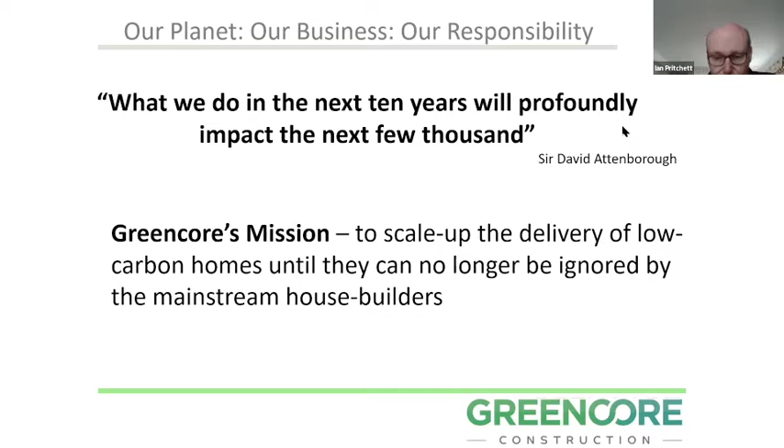Setting the context of what's happening from a political and environmental point of view, I'm really excited about being in Oxfordshire because I think it's one of the places to be working at the moment. All of the councils in Oxfordshire have declared a climate emergency, and we've got this great initiative with Bioregional of One Planet Oxfordshire to make Oxfordshire the first One Planet county in the world.

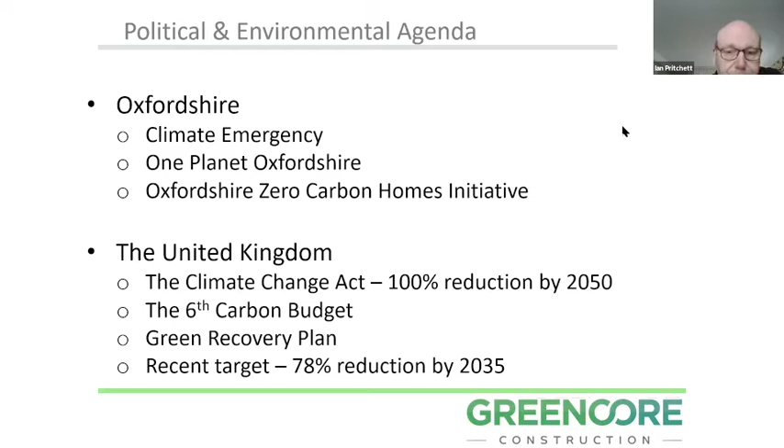There's also this really good initiative with Oxford Friends of the Earth, the Oxfordshire Zero Carbon Homes Initiative. So there's a lot happening within Oxfordshire, but within the UK, we know we've got high-level legislation such as the Climate Change Act, the 6th Carbon Budget, the Green Recovery Plan as a way of recovering from COVID, and a relatively recent target of 78% reduction in CO2 emissions by 2035. So really, everything is set for this decade of change.

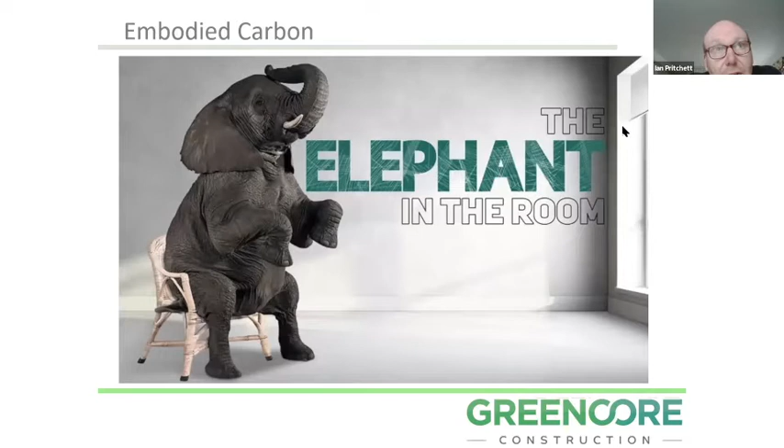But the thing that worries me, the elephant in the room, is embodied carbon. Everybody's talking about zero carbon, but do they really know what zero carbon means? When we build a new house, all of the materials and their manufacture, processing, transport and delivery and construction on site are all responsible for CO2 emissions. A typical house is responsible for something like 50 to 60 tons of CO2 emissions, and that's what's known as its embodied carbon, or its upfront carbon, or its carbon footprint.

And then if we've done a reasonable job of building that house, it's going to emit another 5 tons of CO2 per year in use. So that means that houses we build this year will be responsible for 200 tons of CO2 by 2050. We know we've got a problem with CO2, and yet we are still contributing to the problem. It seems to me that we've got to stop contributing to that problem as quickly as possible.

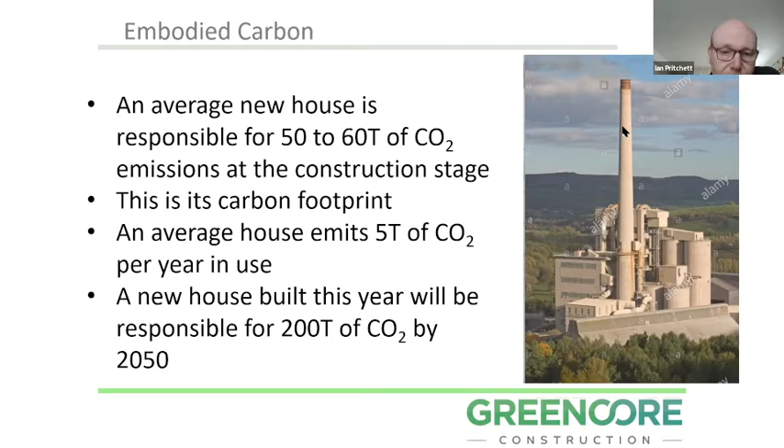Addressing both the embodied carbon and the operational carbon is really important, because when most people are talking about zero carbon, what they really mean is the operational emissions. And we've got to tackle both of these things.

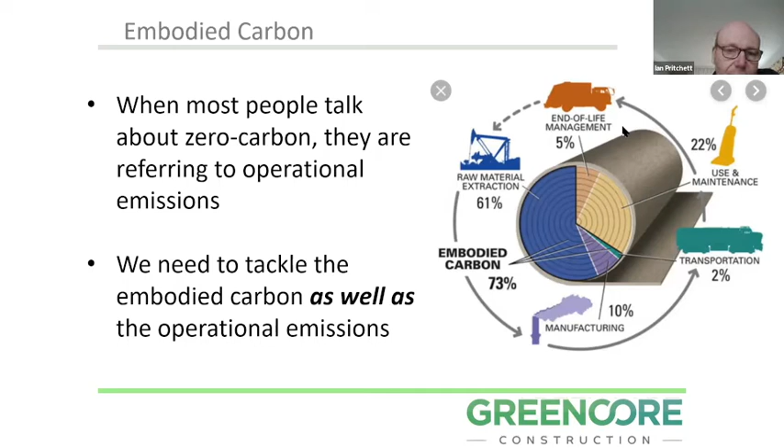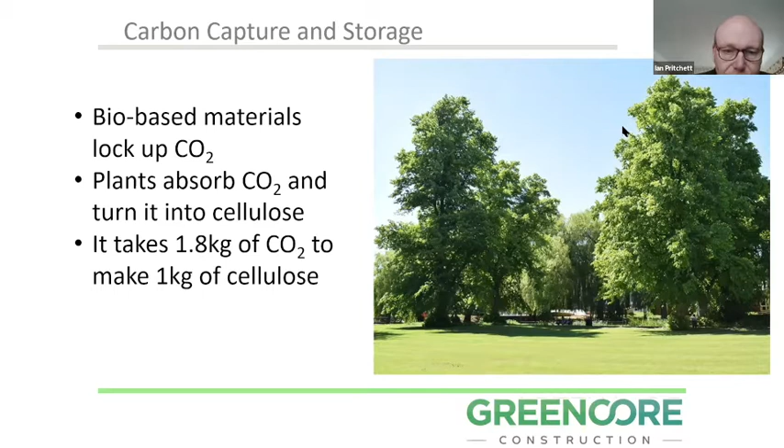Fortunately, bio-based materials are one of the tools that we can use to deliver zero carbon buildings and low carbon buildings, because they capture CO2 during their growth and lock it up as cellulose through the process of photosynthesis. If we work our way through the chemistry and the maths of photosynthesis, there's this great multiplication factor: it actually takes 1.8 kilograms of CO2 to make a kilo of cellulose. So every kilo of cellulose we lock up in a building is actually locking up more than 1 kilo of CO2.

So it's pretty straightforward, really. The more bio-based materials we incorporate in buildings, the more carbon we lock up. Replacing high energy materials such as steel and concrete with bio-based materials such as timber locks up carbon and reduces the carbon footprint. So when we come to design a building, all of the choices we make in the design and construction determine not just what the building looks like, but how it performs thermally and what its carbon footprint is. And if you make the right choices, you can build houses that have zero carbon footprints and zero emissions.

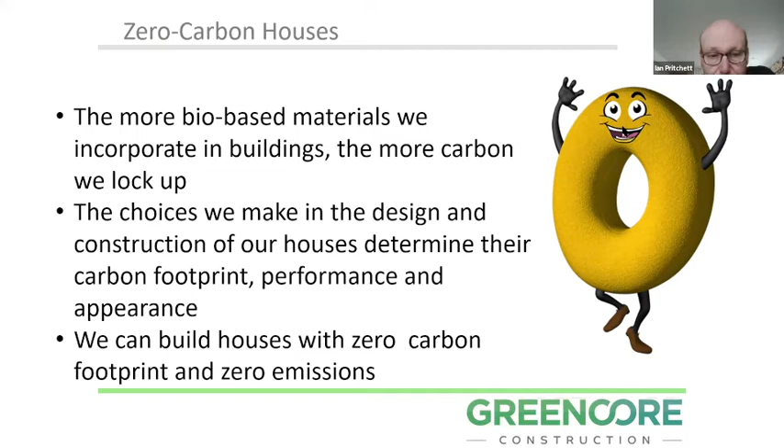And that's what we try to do. So we've been doing this for a few years now, scaling up from single houses to small groups of houses, and then to larger groups of houses.

And as Robert Llewellyn says, isn't this what housing developers should be building? We think it is. So what's special about Springfield Meadows? We set out with a target to have zero carbon footprint in the buildings. We use the passive house methodology to deliver passive house thermal performance, so that's following the principles and hitting the targets, but they're not certified as passive houses. What it does mean is that you've got minimal heating requirements, but passive house is not just about energy, it's about comfort and health as well. These should be really comfortable, healthy houses to live in.

We've assessed the energy use from these houses through regulated and unregulated energy use, and made sure that there are sufficient PV panels on the roof to generate that energy so that they're net zero energy in use, albeit they will be importing from the grid in the winter and exporting in the summer. They're net zero across the year, so that means the houses will have low energy bills as well.

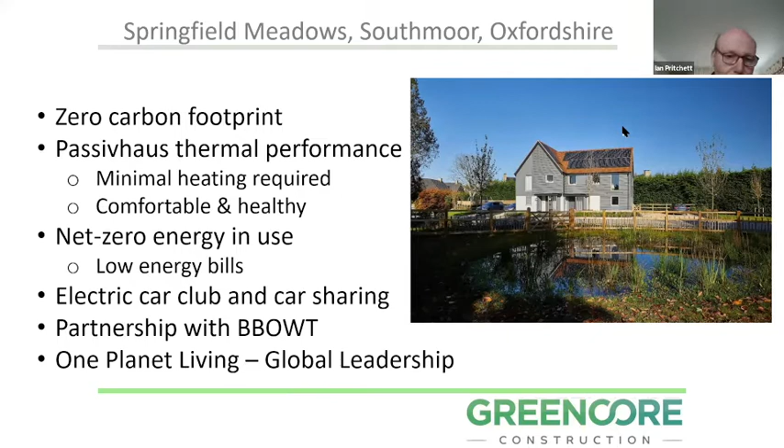As builders, we're all a little bit scientifically focused and data focused, so we tend to be better at focusing on things like energy and carbon. But we find the One Planet Living framework is really good to give us a holistic view of health and well-being, nature, biodiversity, waste, energy, transport, and all of those other things. And this project has been awarded global leadership status.

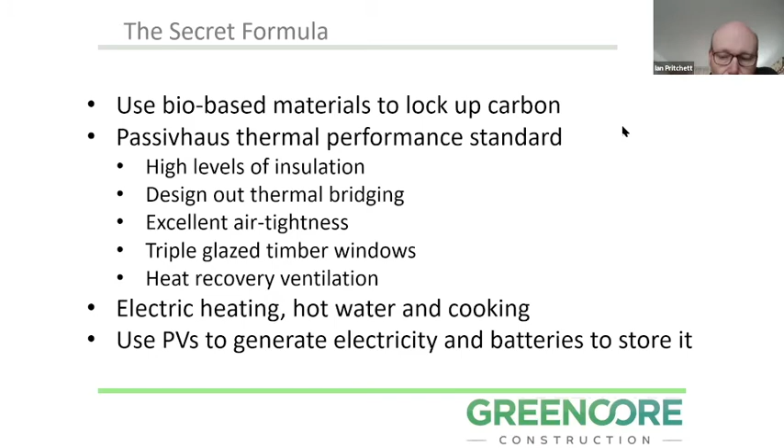So the formula that we use, that we sometimes refer to as the secret formula, but we always share it, is relatively simple. We use bio-based materials to lock up carbon, the principles of the Passivhaus standard to reduce energy use - so that's high levels of insulation, designing out thermal bridging, excellent levels of air tightness, triple glazed timber windows, heat recovery ventilation - and then this is an all electric scheme. So electric heating, hot water and cooking, and then using PVs to generate electricity and batteries to store it. All of these are well-known technologies that if you put them together will deliver zero carbon buildings.

And our target is to do at least 500 homes in Oxfordshire over the next 5 years. And we want to go beyond where we've been so far into what we describe as climate positive housing. We came to the conclusion a couple of years ago that it was no longer good enough to say, how do we minimize the negative impact on the environment? We wanted to ask a different question, which is, how do we create a positive impact on the environment every time we build a house?

So we want to lock up more carbon at the construction stage than is emitted. We want to generate more energy than the houses use. We want to massively increase wildlife and biodiversity. And if we can build enough of these houses, I think they'll act as a catalyst for local food production, green transport, and that sort of thing.

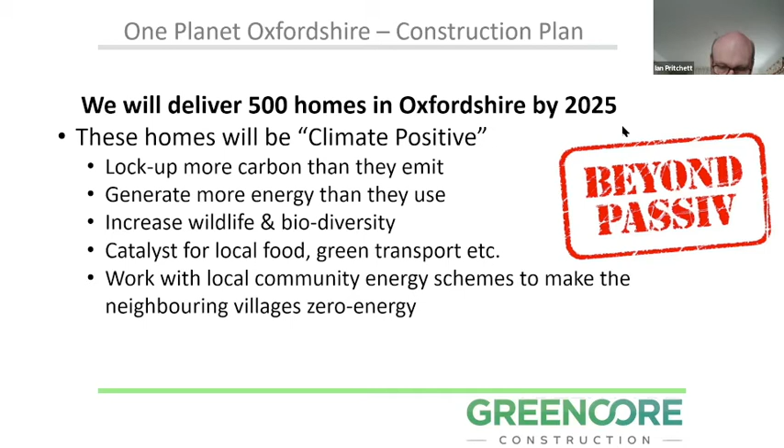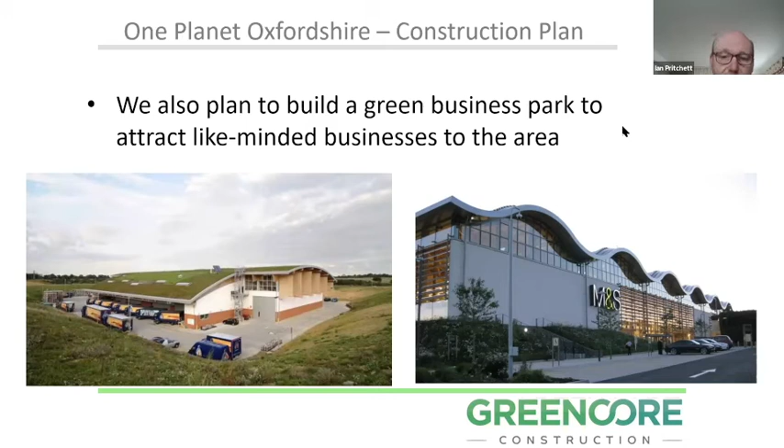And working with local community energy schemes to make neighbouring villages zero energy - so not just the houses that we build to be net zero energy, but I think it's possible to make neighbouring villages net zero energy. And we also want to create a green business park in Oxfordshire, because Oxfordshire is a hotbed of innovation and green technology, and we want a place for all of those businesses to cross-fertilize with each other, to attract other like-minded businesses into the area, and then the ripples of that to go out into the rest of the UK as well to help with the sustainable agenda. So that's what we're trying to do.